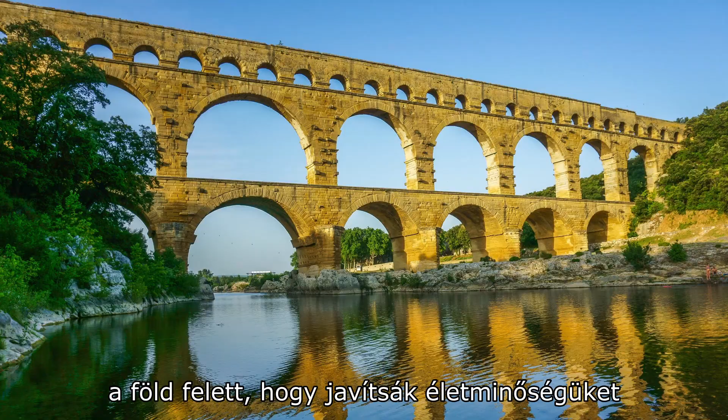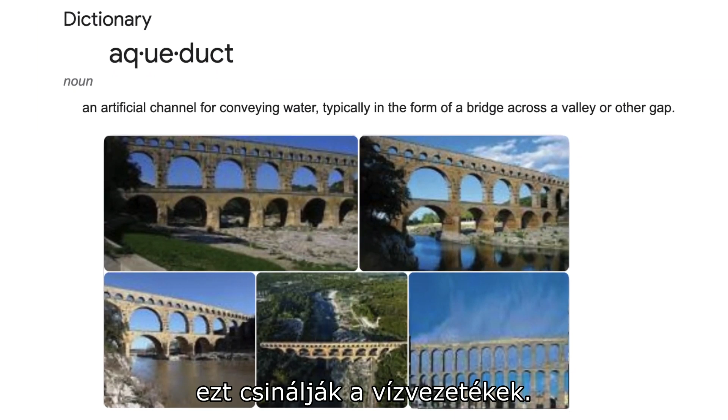Thousands of years ago, the Romans perfected transporting water from faraway sources via aqueducts, which were channels built underground and sometimes more famously above ground to improve their quality of life with a steady supply of fresh water. The term aqueduct means to conduct water, which is what water pipelines do.

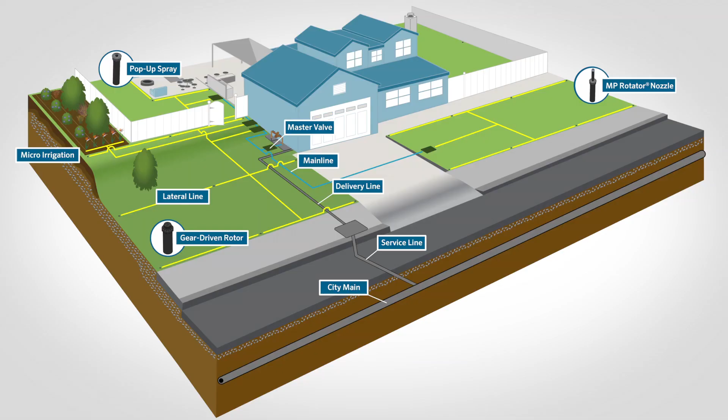Today, our use of water pipeline is one of the most important parts to every irrigation system. We call the network of piping in the ground for these systems mainlines and laterals. The word mainline is used to define a pipe that's upstream of the zone valves. It will normally be the largest pipe on the job.

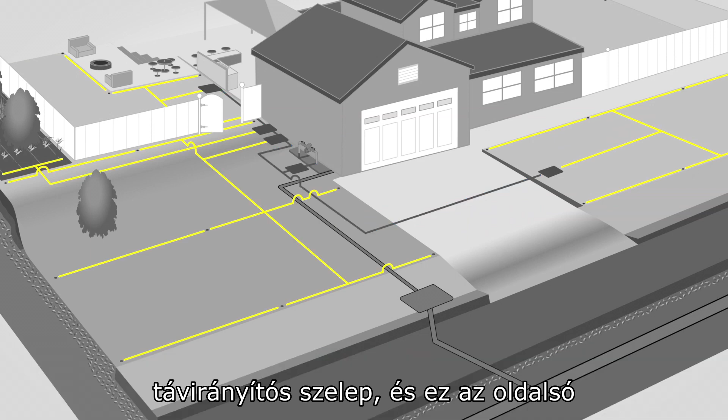Laterals are pipes that are downstream of the remote control valve, and it is the laterals that deliver water from the valve to the emission device in the field, whether that be sprays, MP rotators, rotors, or micro irrigation.

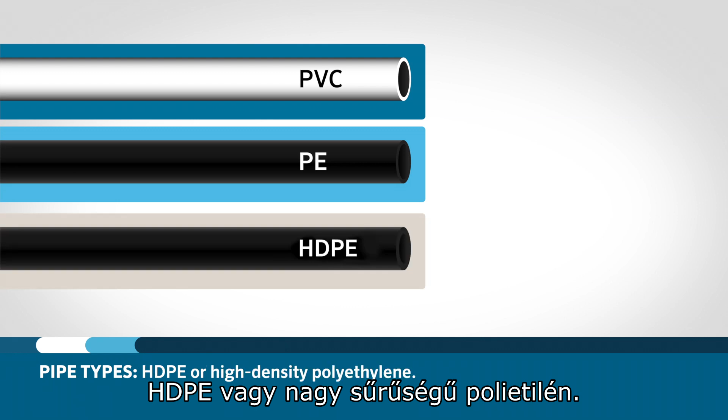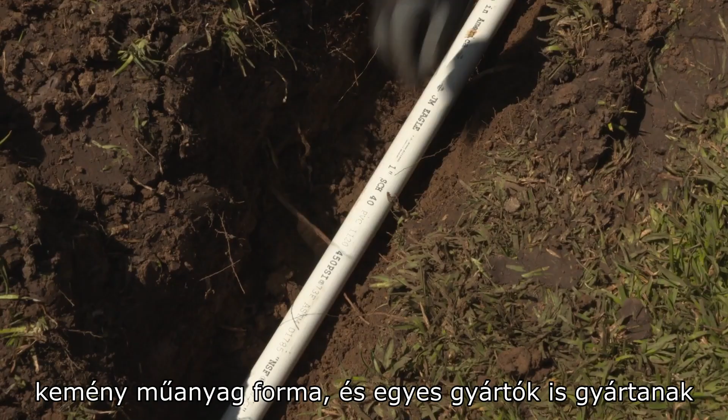There are three main types of pipe that will be used in an irrigation system for both laterals and the mainline: PVC or polyvinyl chloride, PE or polyethylene, and HDPE or high-density polyethylene. PVC normally comes in 20-foot sticks from your distributor. It is most commonly found in a rigid hard plastic form, and some manufacturers also produce flexible PVC that comes in rolls or coils in various lengths.

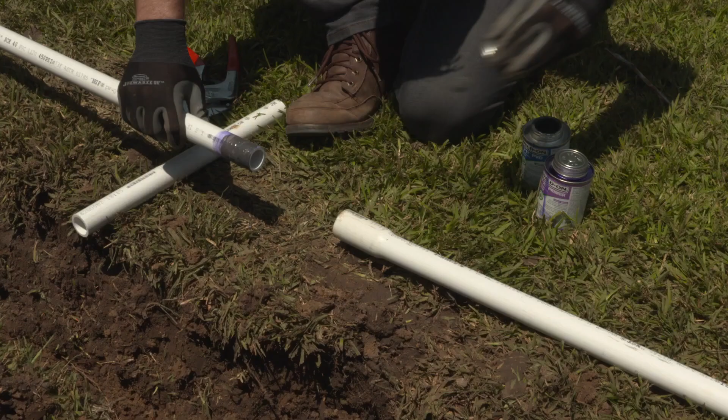PVC will most commonly be joined together with a combination of PVC primer and PVC solvent weld solution. This process is commonly referred to as gluing, but in fact, it creates a chemical reaction to fuse the two pieces of PVC together. Primer begins the chemical reaction that softens the PVC and provides an evenly prepared surface for solvent cement to be applied for the chemical fusion of the two pieces.

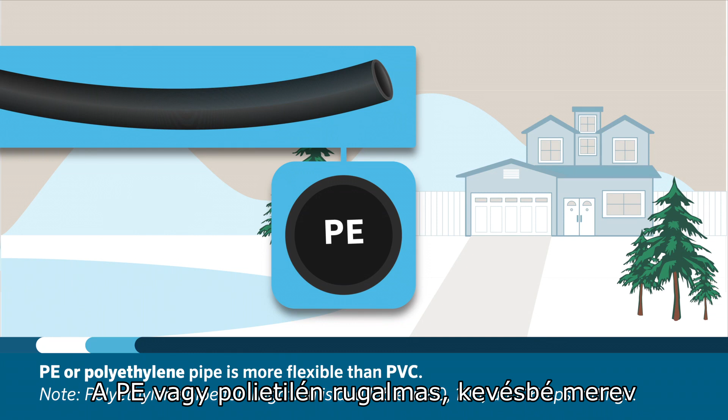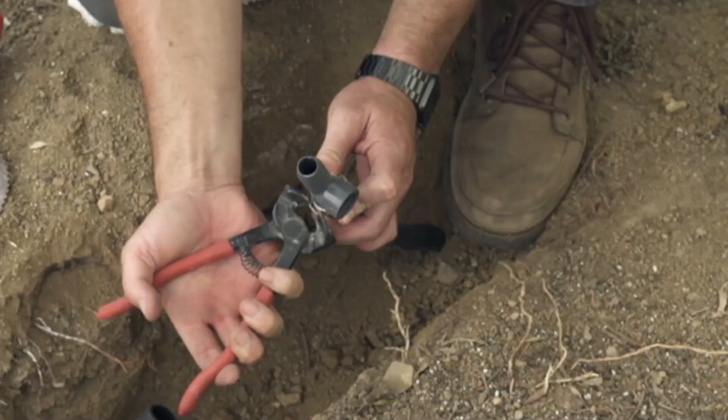PE, or polyethylene, is a flexible, less rigid pipe, normally thinner walled than PVC, and is commonly used in cold weather climates or where pipe can be pulled through the soil using a vibratory plow. Polyethylene pipe requires insert fittings, also known as barbed fittings, and pipe clamps to keep the tube fastened securely to the fitting.

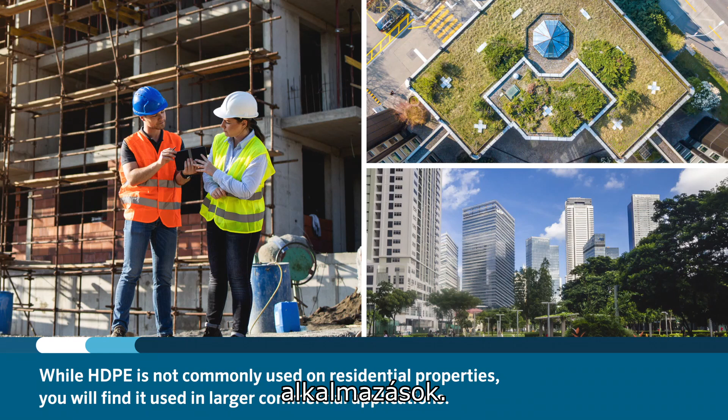HDPE, or high-density polyethylene, is another commonly used pipe type in irrigation. While HDPE is not commonly used on residential properties, you'll find it used in larger commercial applications. It requires more practice and labor time to install. Common terms used for connecting or fusing this type of pipe are butt fusion and electrofusion. Visit an HDPE manufacturer's website to learn more about its proper use and application.

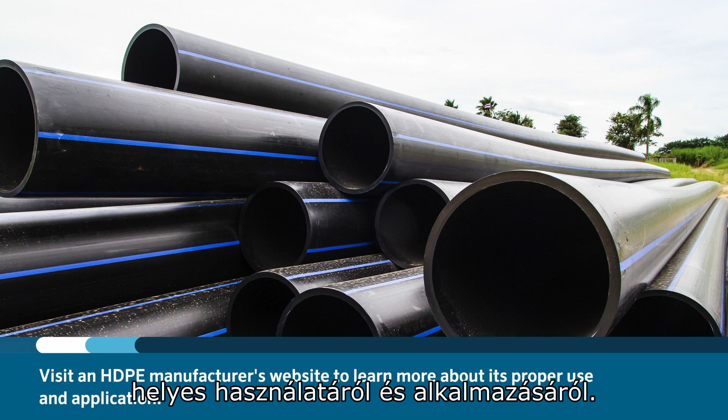Here are some common things to remember when choosing what type of pipe to use for your mainline and laterals. Mainlines commonly remain pressurized 24/7, while lateral lines are only pressurized when a station is running. This will be important to remember when selecting between Schedule 40 and class pipe.

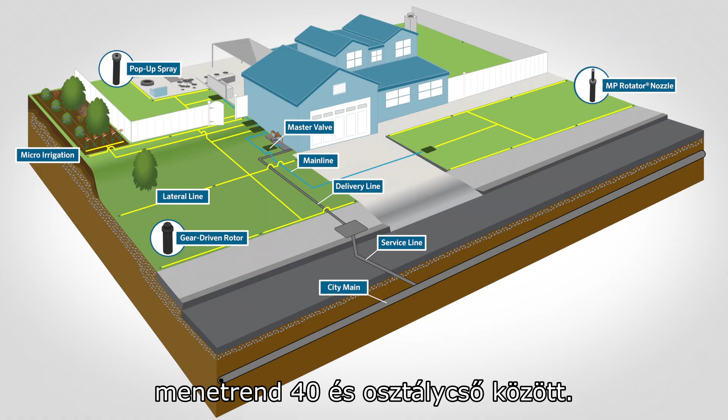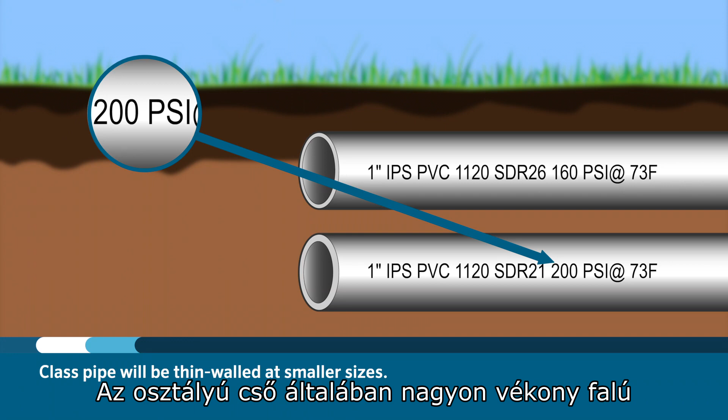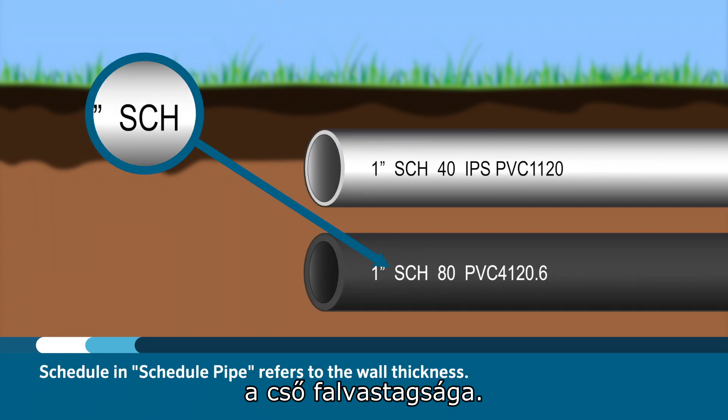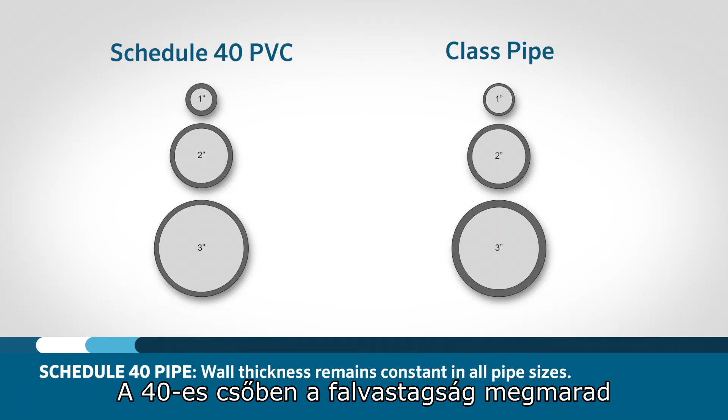The number on class pipe, for instance, Class 200 or Class 315, indicates what the pressure rating is for that type of pipe. Class pipe will normally be very thin-walled at small sizes, and wall thicknesses will increase as pipe sizes increase. The schedule in schedule pipe refers to the wall thickness of the pipe. Schedule 40 is thinner walled than Schedule 80. In Schedule 40 pipe, the wall thickness remains constant in all pipe sizes.

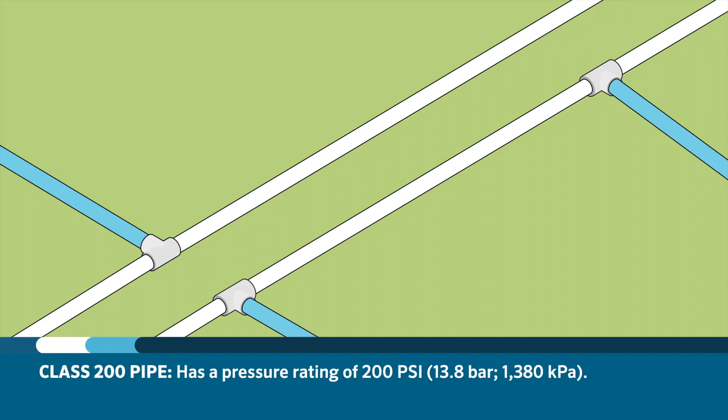For lateral lines, it's a common practice to use Class 200, although some installers may prefer to use Schedule 40 pipe to stay consistent with the pipe that they are using throughout the whole installation. Class 200 pipe at any size has a pressure rating of 200 psi.

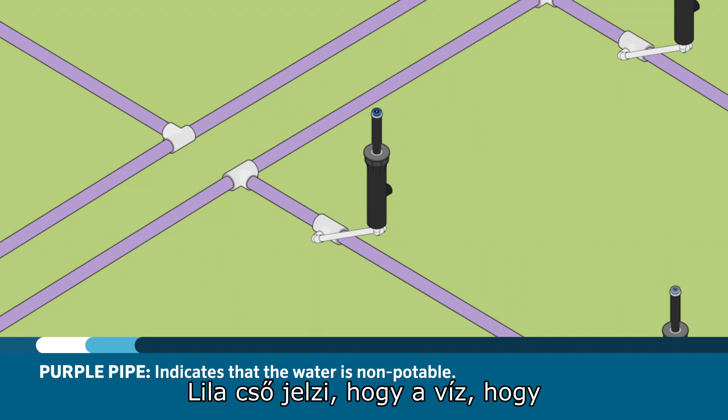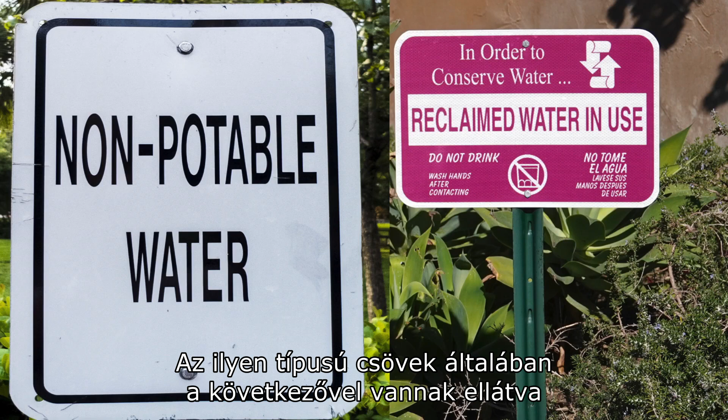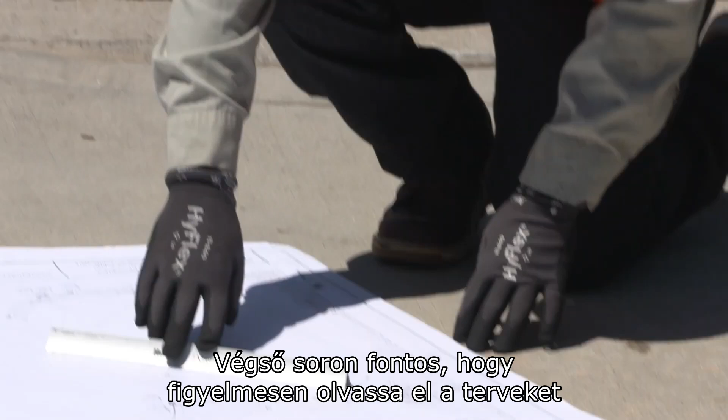If you are irrigating a project with non-potable water, it is recommended and sometimes mandated by local code to use purple pipe. Purple pipe will indicate that the water that is traveling through it is non-potable and should not be used for drinking fountains, hose bibs, or any other connection that someone may possibly drink from. This type of pipe is normally labeled with one of the following: recycled water, reclaimed water, or non-potable water, and all will have a do not drink warning printed on them. Ultimately, it's important to read the plans carefully to determine what pipe is being specified for the installation.

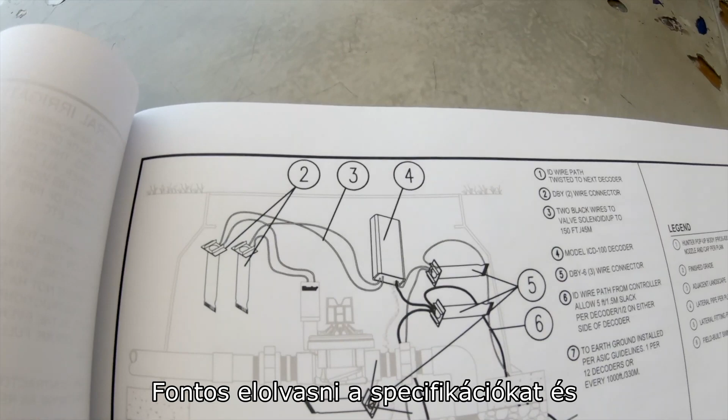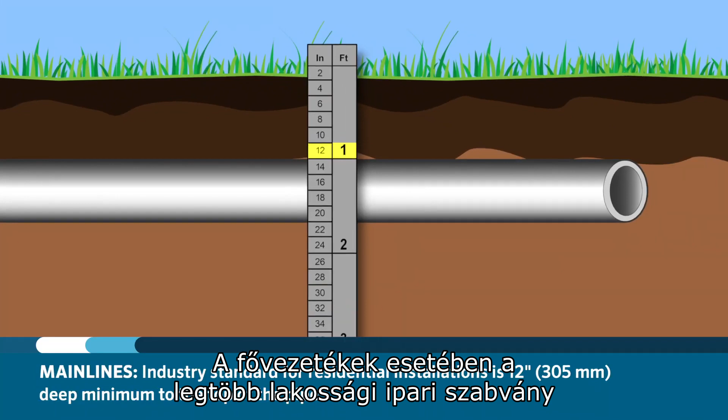It is important to read the specifications and construction details on your plans to determine what the proper depths of each pipe should be before trenching for mainlines and laterals. For mainlines, an industry standard for most residential installations is 12 inches deep minimum to the top of the pipe, while commercial installations should be 18 inches minimum. When installing laterals, a good practice is to install them at 8 inches deep to the top of the pipe for residential installations, and 12 inches deep for commercial installations.

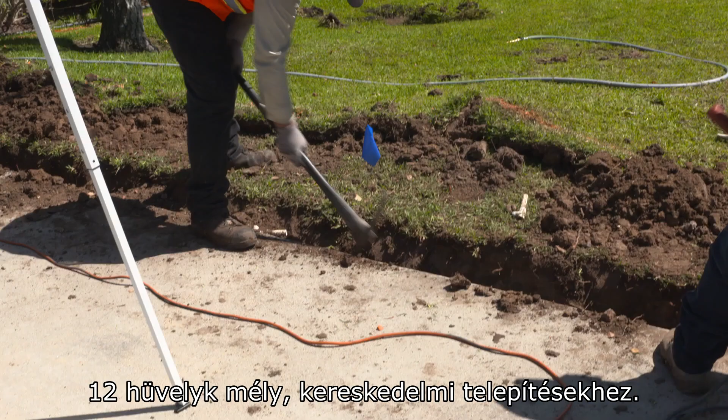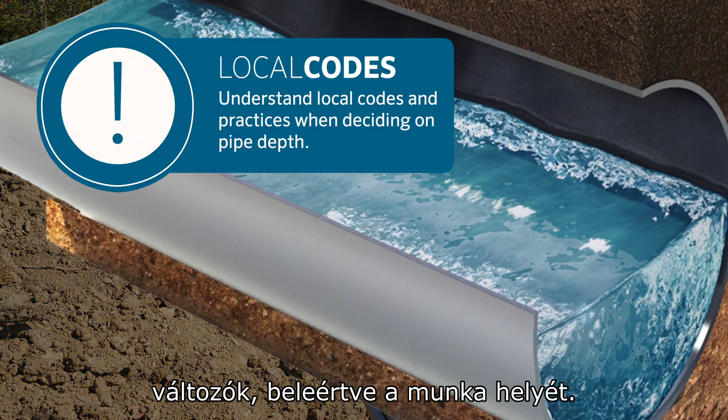It's easier to dig a little bit deeper than you think you need, rather than to return later, remove the pipe, and retrench. These suggested depth numbers are based on many variables, including the job location. Be sure to understand the local codes and practices when deciding on pipe depths.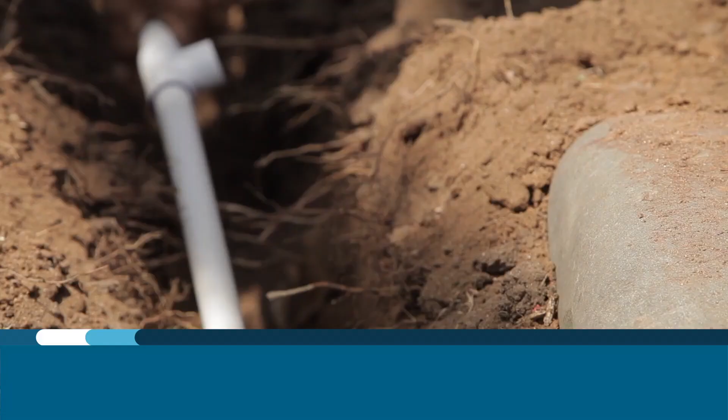When laying the pipe in the open trench, be sure to install the pipe with the writing facing directly up. Getting in the habit of installing pipe this way will make it easier when the inspector comes to take a look at the installation of your irrigation system. The inspector will expect to see the type of pipe that you use to make sure that it matches the specifications and detailed drawings on the plans.

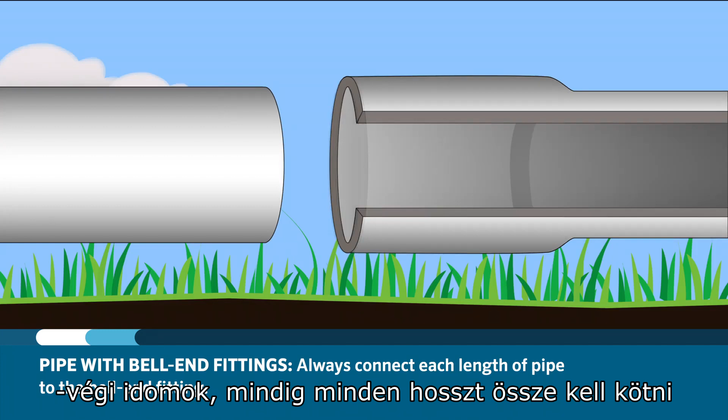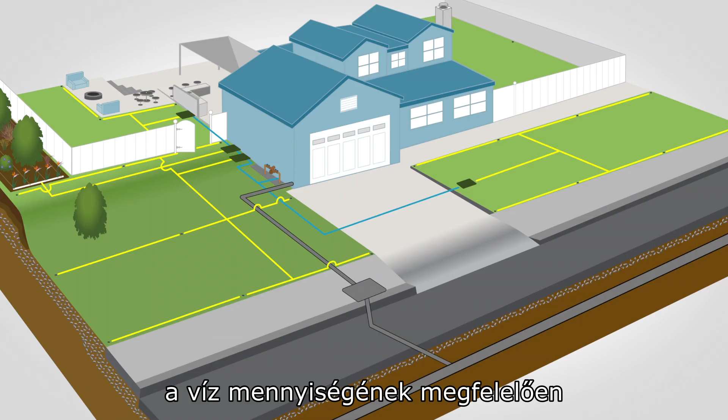If you are installing pipe that has bell end fittings, you should always connect each length of pipe using the bell end fittings and cutting into the pipe where a T, ball valve, or other fitting may need to go. All piping in the system should be sized according to the amount of water that will be passing through it, always maintaining a safe velocity of flow.

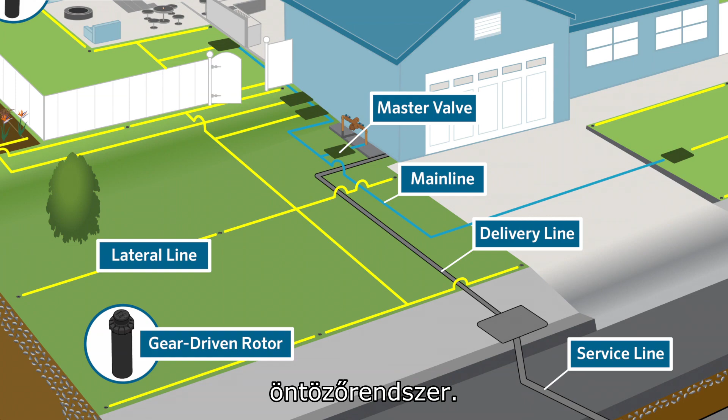Moving water from a faraway source to individual locations is an innovation that has been used for centuries. These days, techniques are more refined, but the result is the same: a long-lasting, well-functioning irrigation system to support healthy landscapes. Mainline and laterals are the backbone of an irrigation system. When you begin your irrigation project, pick your pipes according to their function and read the plans to ensure that changes of pipe size in the field occur where noted on the plans.